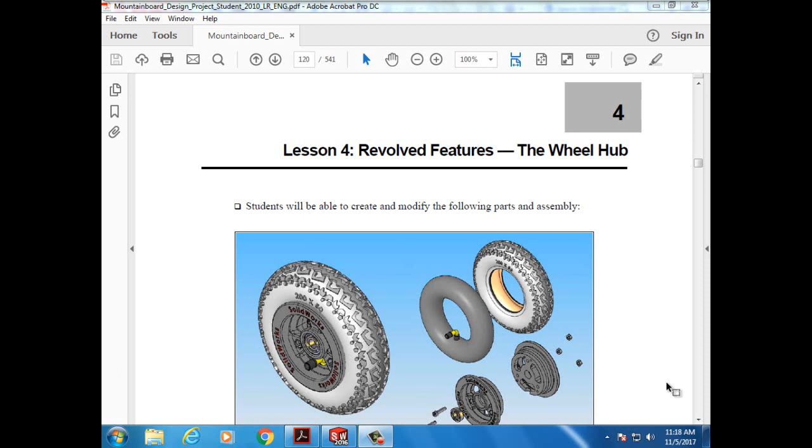For this lesson, lesson 4, we'll be looking at the revolved features by creating this wheel hub here. Students will be modifying all of these parts. This will be your completed assembly, the entire tire, and you'll be putting your name on the side of the wheel hub and creating an assembly to put everything back together.

So let's take a look at the first thing we'll be doing today, and that is we will be creating this circular object. All right, so we're gonna open SolidWorks, and we're gonna have a new part. What we're going to do is start on the right plane, and we're going to create this. This is approximately 25 by 25. Now, if you see here, this is 21. That's approximately 25 by 25.

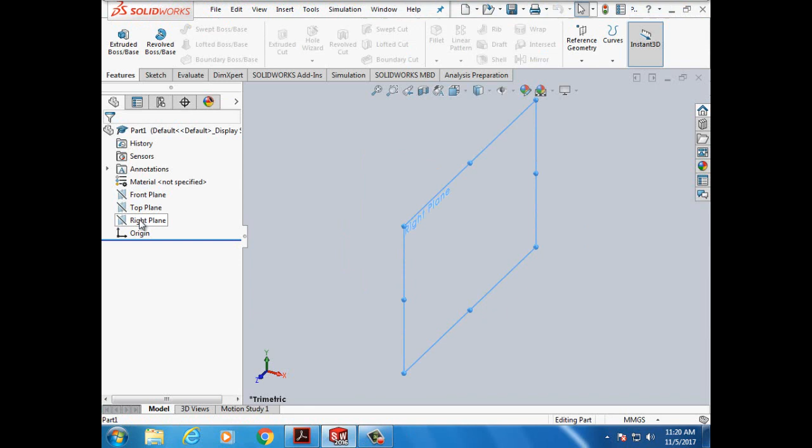We're going to be creating a center line to use, and we're going to be going right off our origin. Using that, we're going to go from the top left side of our origin to put this together. All right, so we have our new part. We're using the right plane, and we're going to create a sketch, and it's going to be rectangular. We're going to use the corners, not the center like we were doing before.

First thing I want everyone to do is go into our tools and make sure that we have this in millimeters. We're going to hit tools, come down to options, and then go to the document properties, and we're going to do units, and a lot might be set to inches. We want it to be on millimeters, and then we're going to hit OK so we know what we have here. So here's our origin point, and this is our right plane.

We're going to do our corner box. As we see from the drawing, we want it to be approximately, not smart dimension, but approximately 25 by 25 millimeters. We can look at that, and that's approximately that. Now, if the box is small, I can just roll in with my mouse to make that larger. And let's take a look. So we have our box from the origin.

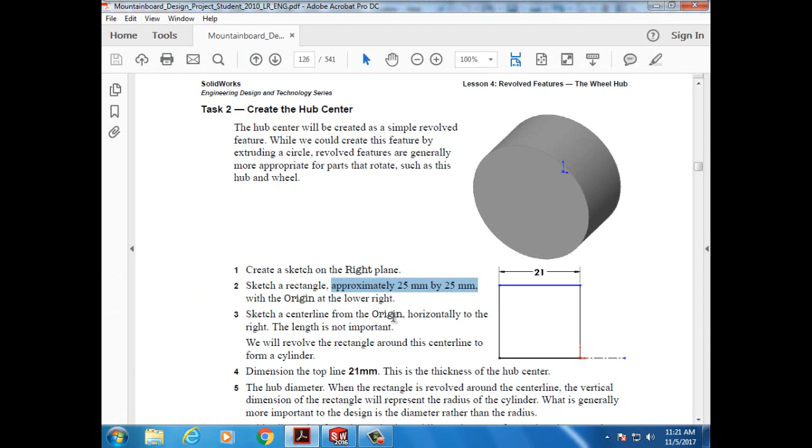Sketch a center line to the right. So we're gonna come up here, and we're gonna go on center line, and we're going to do the same thing from the origin. We're gonna draw a center line to the right. So this is what we have so far. Dimension the top of the line to be 21 millimeters. So we're gonna smart dimension the top across.

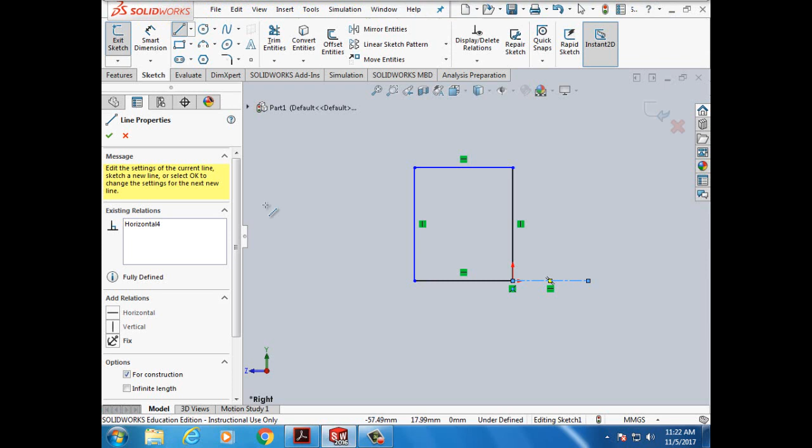We're going to want our circle to be a diameter of 40. So we're going to want to make this 20 for our dimension upwards. So let's take a look at this. Now we got our smart dimension tool. We go to our smart dimension tool, and we have this set up. We don't want that. Turn that off.

Click Smart Dimension tool. We're going to want to pick this line, and we want this to be 20 millimeters, 20 mm. We hit OK, and we want this top to be 21 millimeters, 21 mm, and we hit OK there. All right, and we can go off the Smart Dimension, and now that we have it smart dimensioned, our diameter is going to be 40, so this is going to be 20.

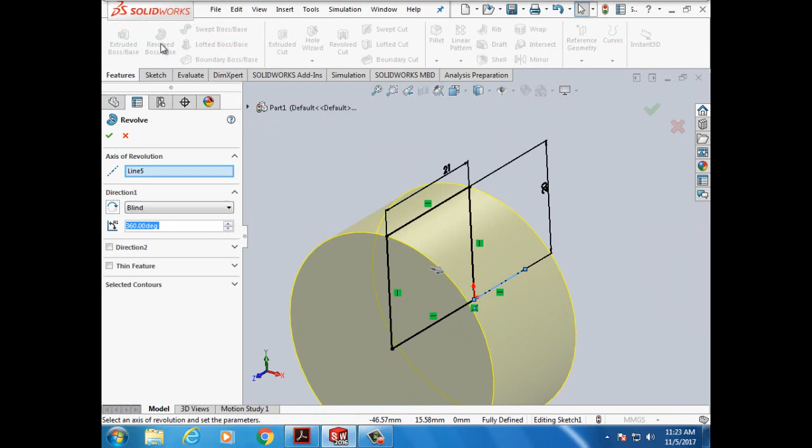What we're going to do is come down here, and we're going to revolve the hub. So we click the Revolved Boss Base feature on the Features toolbar. We go to our Features toolbar, and we do Revolved Boss Base, and you can see it already set it across for us. We want this line to be our axis line here, which was pre-selected, and we want this to be 360 degrees.

So we look at this, we have line 5, which could be a different line number, but the one we have is line 5 because we have the 4 lines for our rectangle, and then our center line was line 5. And we want this to go around 360 degrees in one direction.

So we're just going to leave it, for the dimension, we're going to leave it blind. And that's our one direction. All right, and then I hit OK, and we have our circular shape here. Okay, so

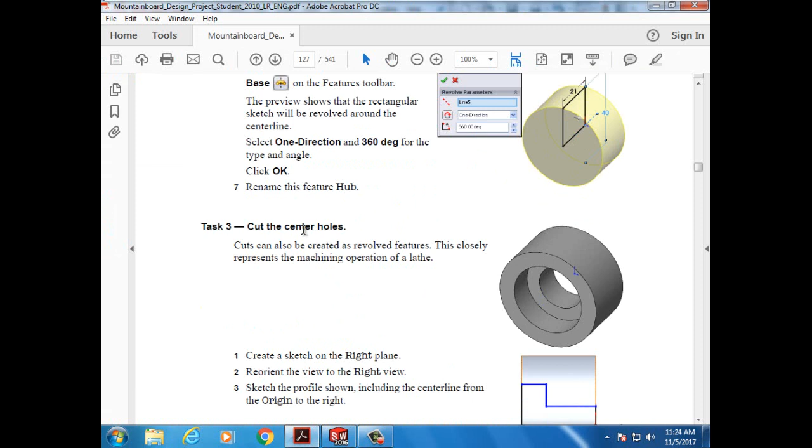next thing we're going to do is we're going to cut the center holes. And once again, we go to the right plane, and we want to have the right view, and we're going to draw on that plane. We're going to draw this shape, and then we're going to smart dimension this shape so that this is 8 across, this is 18, so 18 from top to bottom would be, half of that would be 9, and then

we have up and down here we have 14 plus 14 is 28, so this would be 14 up and down, and this would be 9 over here, and then this is obviously 8 across. And then these lines are just going to fall. We're not going to smart dimension these lines.

This across is going to be 21 because it's the entire length, and then these lines will just fall into our dimension. So the first thing we're going to do is we're going to draw all these lines in retrospect on the right plane using our right view to do that.

So I'm going to click on this, and that's the left view, that's the front view, this is the right view. So I got the right view, and I'm going to click on the right plane to select that. So you can see it says right plane, and now I'm going to pick sketch because I want to draw on the right plane. So I have the right plane selected first of all, and I'm on my right view, and I'm going to pick sketch,

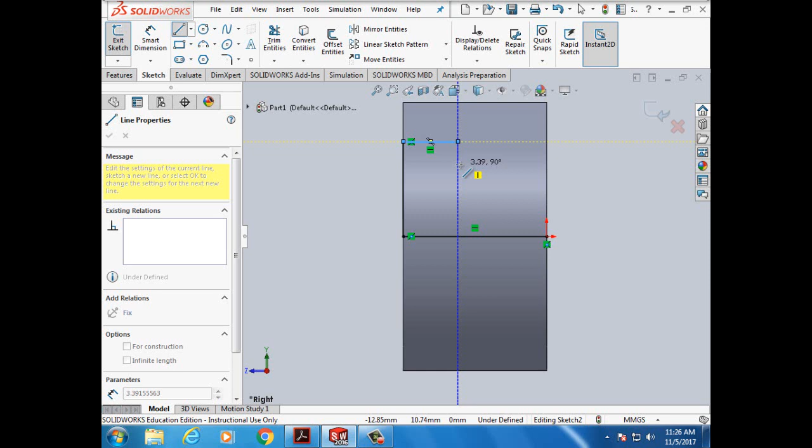And then I want this to go down a little bit. And then I want this line to go over. And then this line should be 9. It's a little more than 9, but now I'm going to smart dimension everything. So I go, okay, that's great. So now I'm going to smart dimension. So this line was already selected.

If I didn't want to select that, I would select off smart dimension, and then I would click somewhere. You see how that was blue and now it's not blue anymore? And then I click select smart dimension. Then I could pick any line I want. So I can pick this line here, and I could say I want this to be 8 millimeters.

And then I could pick this line here, and I could say I want this to be 9 millimeters. And then I could pick this line here, and I could say I want this to be 14 millimeters. Alright, so

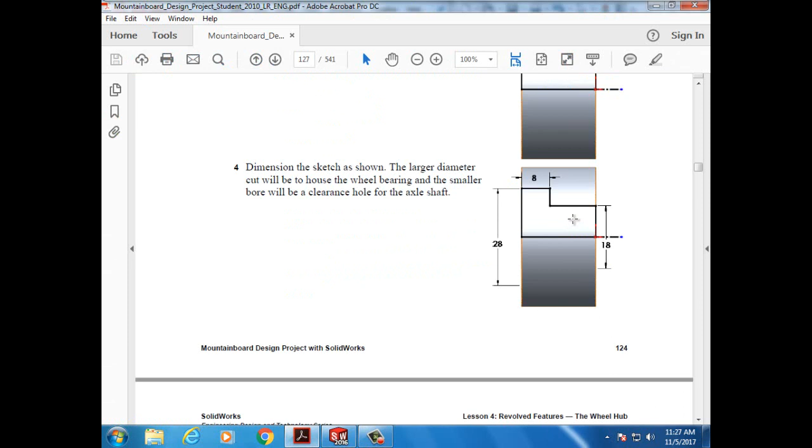something I have to add to this now, I click off my smart dimensions and click that. And then I want a center line right off the base going in this direction, just like I had before. And that's because I'm gonna do something here. So I got this all drawn, 14 up, 9 across, 8 across, and then these just fall right into place.

Now I'm going to do the Revolve Cut on the Features menu, and I'm going to pick that line that I had drawn, my center line, and it's going to revolve it around. So I go, this is great, this is great, Features, Revolve Cut, and you can see that it already picked this line over here.

If it didn't pick it, I could click somewhere else. So that's line 6. That's not going to work as good. So I want line 9, which is this one way over here, and I want that to be 360 degrees, and we'll leave this in blind again.

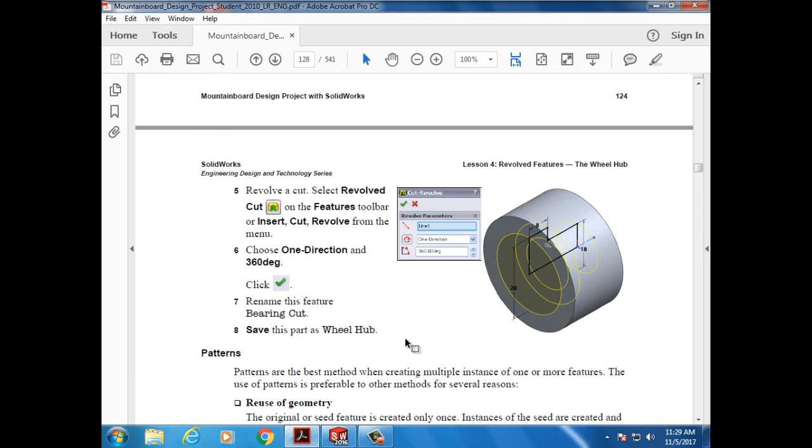And then when I click on this, it doesn't look like anything happened, but if I click on my right arrow, you could see that I've trimmed this circle out, and I have something that looks like this now. So we save this and we name it the wheel hub. So now I'm going, okay, I got this done.

File, save as, and I'm going to call it the wheel hub. And make sure you put it in a file where you know where it's going to go. So I'm going to change this, and I'm going to go to my POE folder.

And this is lesson 4, and I'm just going to put the wheel hub in there and save it. So now I know exactly where my file is. If I want to open it tomorrow and add more to it, then I can do that. So we got this done.

Now we're looking at patterns. We're looking at creating a spoke. All right, so create the sketch on the front plane, and you want the front view to do that. So first thing we're going to do is we're going to come over here, and we're going to open this up again. And we have our left view, our front view, our right view, our back view. We want the front view, right? So this is what it looks like.

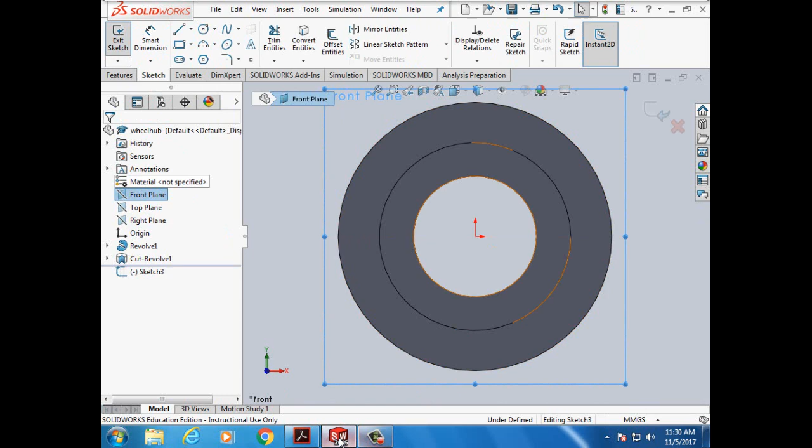And then we're going to go on the front plane. So I'm going to click on that. And you can see this is going to say front plane. And then we go on sketch. And now I'm going to open my sketch. You can see here's our origin here. And it says use dynamic mirror entities, but I don't like using dynamic mirror entities. We're just going to use regular mirror entities.

So we're going to draw this center line from the origin, as it states. So zoom out a little bit. I'm going to pick center line, and it just says draw a vertical center line up. So that's what we'll do. Pick the center origin. Straight up. I can zoom out while I'm doing this. Doesn't give us any specific measurement, so that looks good.

And next thing we're going to do is we're going to sketch a line from the hub outward. Symmetric line will appear. So we're drawing this line out to the side. And like I said, I'm not going to do the dynamic mirror entities. I'm just going to do a mirror entity, so that it is symmetrical. Okay, this is great. So now I have a regular line, and I pick. See how that turned orange right there? I pick a point, and I'm going to draw outward from there.

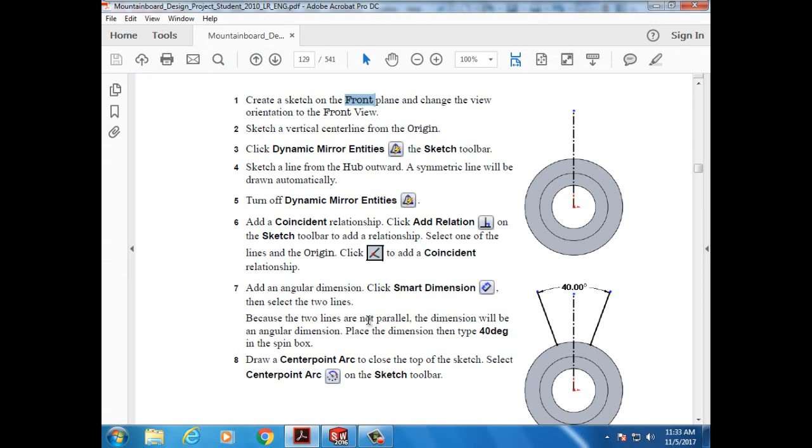Alright, so add an angular dimension between the 2 of them so that it's 40 degrees between the 2 lines. So we go on our smart dimension here. I click on this line, and then I click on this line, and then I make it 40. It's 40 degrees is what it's going to be. So you can see this made it 40 degrees. So that's all set right there.

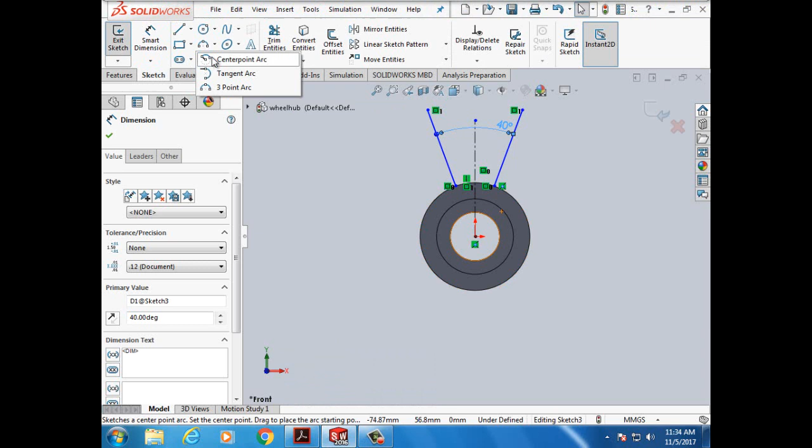And then create a center point arc to close the top of it. And then set the radius to be 43. So get off the smart dimensions. I want a center point arc, and this is obviously the center point. I click on the center and I drag, and then I click on this guy and I draw that across until this turns orange on this side. I can let go, and now I say, okay, that's great.

And then I smart dimension this so that I want this to be 43 millimeters for the radius. So it's set at 49, so I'm gonna put 43 mm. And now I have this shape up here. It's gonna be a spoke.

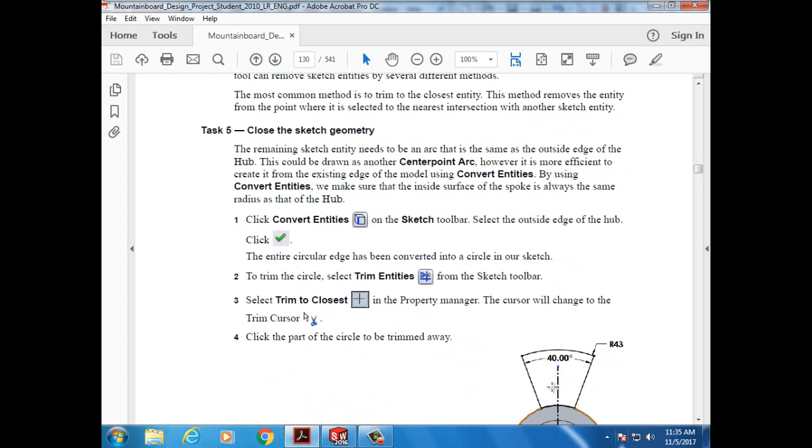All right, so now we're going to talk about converting entities and trim entities. So we come over here to close this geometric entity so we can do something with it. You can see we're gonna create this line right here. So first thing it says, click the convert entities and select the outside edge of the hub. So we want to convert entities. Well, let's get rid of this first. Okay, so now we go to convert entities.

So we have convert entities. We want to make sure we're there, and we click on the outside. See how this whole thing turned orange? Okay, that's great. So that means we selected that whole edge right there.

The entire circular edge has been converted to circle. To trim the entity, select Trim Entities from the sketch, and then Trim to closest, and then click on the part that is being trimmed away, which is this outside part. See the little scissors right there? So we go OK, that's great. This is what we wanted.

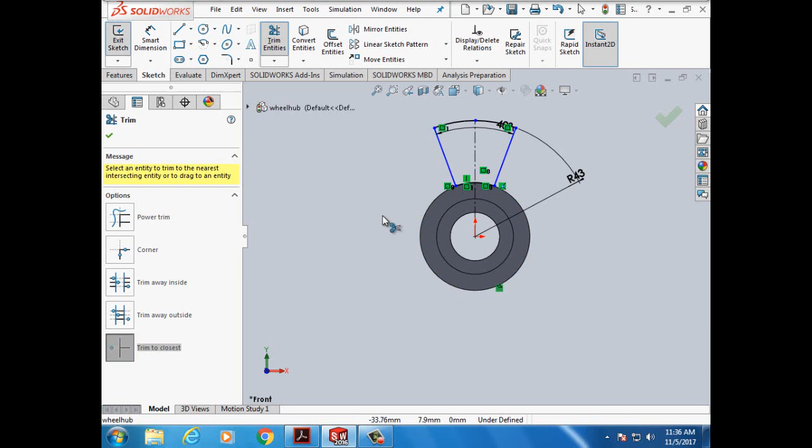And then we go on Trim Entities. It might already be selected because this is the one we use a lot. So you go Trim to closest, and we click on the outside edge, and that trimmed it away. Didn't really look like much happened, but if I zoom in, you'll see that this part of the circle is still dark, and this part isn't.

What we did was cut away everything that was outside of these two lines, and keep this. So this is a closed geometric shape. Now it's a closed unit. This dot is connected to this dot, connected to that dot, connected to that. And now we can come down here and extrude the spoke to a blind depth of 15 millimeters.

So we go OK, that's great. We close that up. We go under Features and we go Extruded Boss/Base, and it's already set at 10 millimeters, but we want it 15 mm. Then I can click the arrow, and I want to make sure that it's going in the right direction. Okay, that's the correct direction. So I click OK, and this is what we have now.

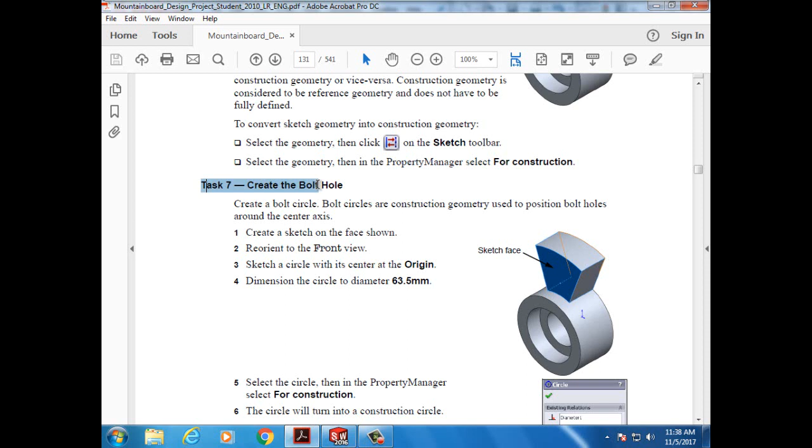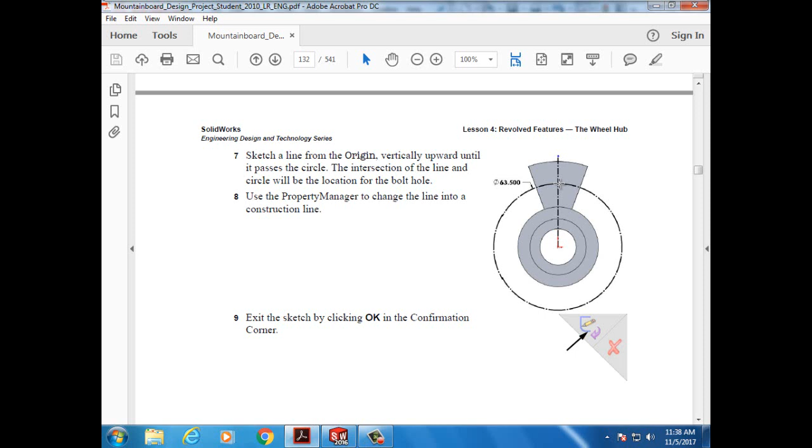So now we're going to do task 7. We're going to create a bolt hole. To do that, we're going to click on this sketch face to highlight it, and orient it to the front so we can look at it. We're going to sketch a circle with the center at the origin, and its dimension is going to be 63.5. So we need to create a center line and a circle for construction so that where they intersect, we know exactly that's where we're going to create this.

So let's take a look at this. First thing we want to do is look at the front hub here. We're going to select the front face, and we're going to do a sketch, and we want a center line that goes from the center point straight up, and so long as it's larger than our whole wheel hub, that's all we need. That's great. And then we're going to go on a regular circle. So select it, and I start in the middle, and I pull this out.

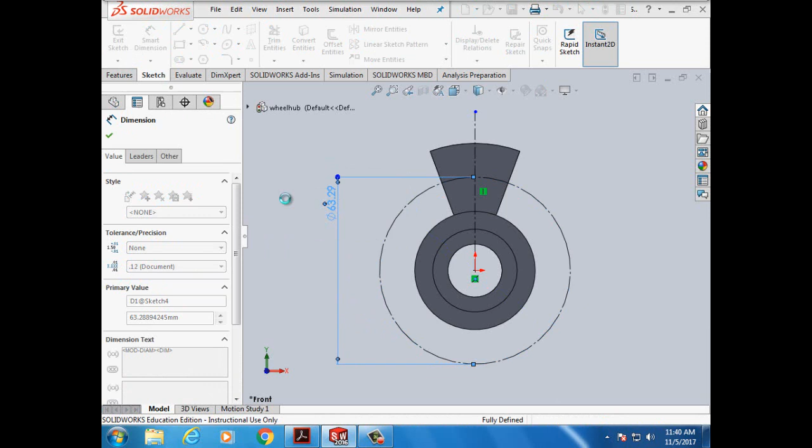And this is our smart dimension. Right here we can set it for construction. If you click on that, you'll see it's dashed lines now. It's not a real circle, it's an imaginary circle that we're going to use for construction purposes. We're going to smart dimension that so that it's 63.5 millimeters. And we go OK. So now we have this intersection, our straight line up, and this circle that's 63.5. So this is the center point of our wheel hub spoke.

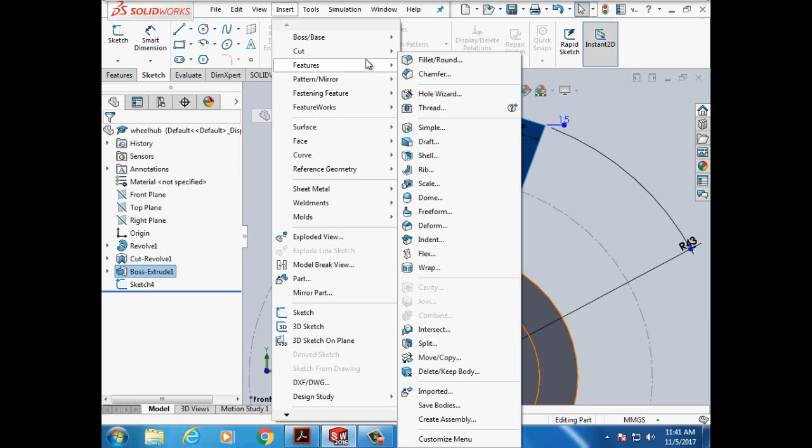And now we're going to add a hole using the Hole Wizard. First, we're going to select the face of the spoke again, and then we're going to Insert, Features, Hole Wizard, and set all these dimensions the way we want. So exit sketch. First we select the face, and then we do our Hole Wizard. Insert, Features, Hole Wizard.

This is a little bit different because this is the latest version. What we want here is this kind of hole. This one's still the same. And we want it to be metric; it's in inches, so we're going to change that to metric. And then we want screw clearance type. Let's see what we got here. And then we want M6 and Through All.

M6 and through all, so through all is selected. Alright, so that's fine, so this one. Now for position, so we got all this. This is all set, we clicked here. We want metric, we want screw clearances, M6, and then through all. The rest of it we can keep the same way.

Alright, so now you click on the positions tab. You could edit the location. So let's go to our positions. So this is our positions, and this is really nice.

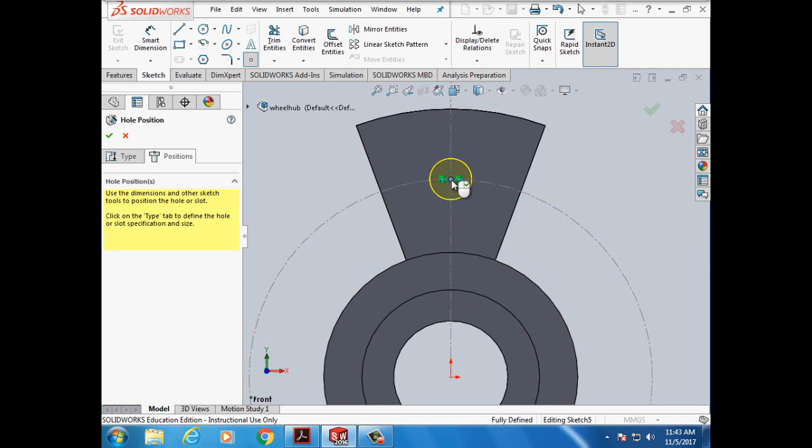So you could see I have this circle coming in here, and that orange circle right there is where they intersect. So I just click there, and this newer version is a lot easier. So we had it all set, and then it intersects. So now we can just hit it, and there's our hole. So there you go, it's that simple.

Alright, so this is what we have. It looks fine like now. Now we're going to add a hex cut.

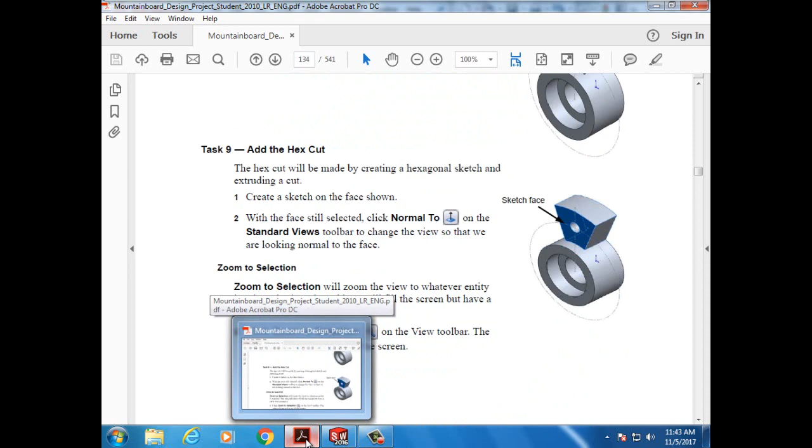We want to go to create a sketch on the face shown, so we're going to select that face, and then we want to do the normal to standard view and select it, zoom in, and use the polygon tool. We could just draw it right in the middle, we'll show you that. The instructions say to go offset a little bit. Alright, so...

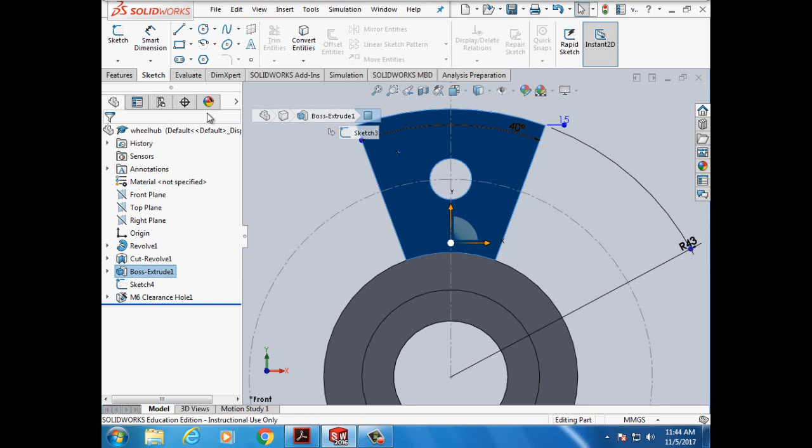First thing we want to do is select the face. It says to do the normal view, but I'm not going to do that, I don't think I really need it. So I'm going to go on sketch, and then I want the polygon tool.

And I think we want 6 sides, right? 1, 2, 3, 4, 5, 6. Yep, 6 sides. Here's all the, we're going to want it to be concentric, and we're going to want the diameter to be 10.5 millimeters. Alright, so I selected this.

We're on the face. So concentric means they have it off to the side, and then they add relations. But this is concentric right here. So I'm just going to start right at that little orange point, and I'm going to pull this out, and it's going to look like this, but we're gonna straighten it out.

So I click that, and then I'm going to want to smart dimension this, and I'm going to want the circle part to be, I think, 10.5 millimeters. Alright, so 10.5 millimeters, alright, so that's the correct size. And you go, okay, that's great, all done with that.

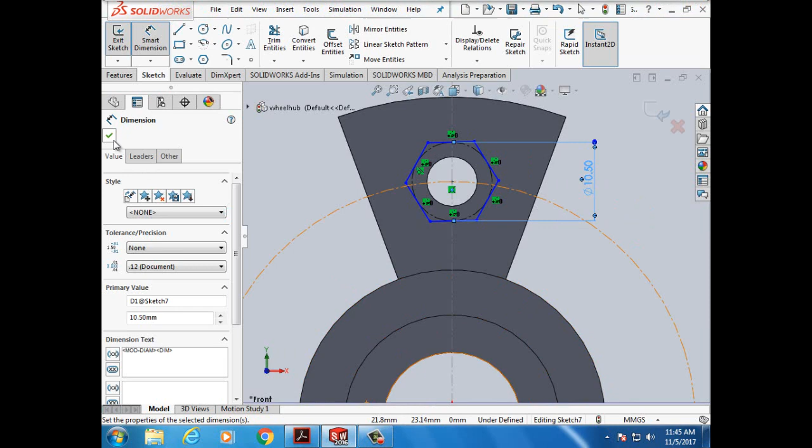Alright, so now what we want to do is, I drew it horizontal, but we're gonna add relationships there. So we can do add relations, and I could just pick any one of these lines. I could pick this one or this one, I only need one line though. So I pick one line, and I want it to be horizontal. So you can see it turned slightly, so now I know it's truly horizontal.

So next thing we're going to do is we're going to extrude cut, and a depth of 6.5 millimeters. So I'm going to, it's a 15, I want 6.5 millimeters.

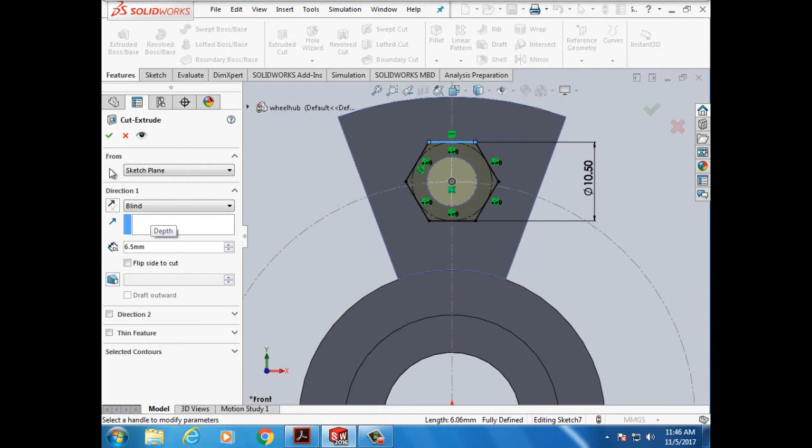And you can't see anything yet, but you can see that I cut it. Let me zoom out so that you can compare this to the picture we have, and you can see that we have that.

Alright, so before I do anything else, I'm going to save it. It asked me to change this sketch to hex cut. It's not really necessary, but obviously I can right click in there, or I could double click on it.

There we go, and I can hit backspace, right, here we go, and I could call it hex cut. It's just simply so you know exactly this is the hex cut. It's not really necessary that you do that, but it's nice to be able to do it so that you have a better understanding of what we have over here.

Now, once again, I said I was going to save it, so I'm going to hit File, Save. You should probably save more often than me in case you run into some type of mistakes, but here we are, very good place to be.

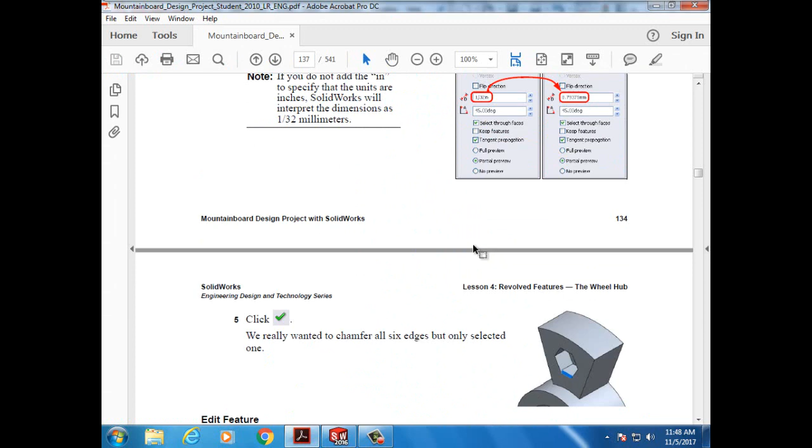And the next thing we're going to do is we're going to end up chamfering our dimensions, and we're going to chamfer all these sides all the way around, all 6 sides, no big deal.

And this is what we want our chamfer to be: 1/32 inches, or if you type that in as 1/32 IN, it'll convert it to millimeters for us to give us a more precise measurement in millimeters. So let's go ahead and do that.

In SolidWorks, we have chamfer, and just start with one line. Here's in inches. I go 1 divided by 32, I think, right? 32, and IN for inches. And if I just click somewhere...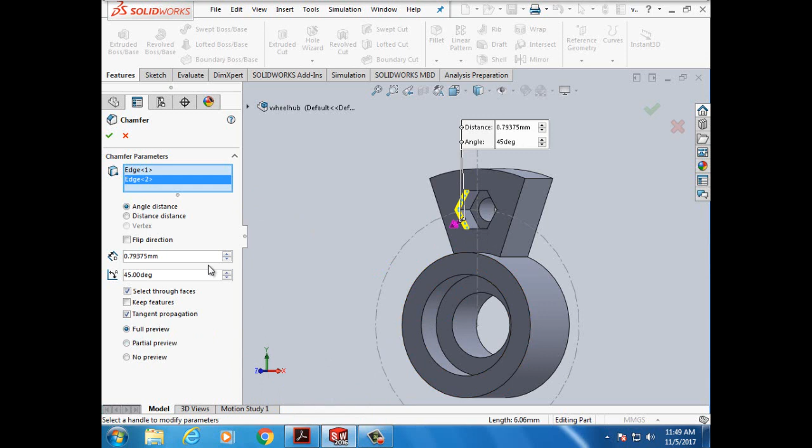Is that 45 degrees still? Full preview. There we go. So you can see it's translated into millimeters for us.

And then I just pick these lines. I could zoom in to make sure that I get the exact line I want. I could also push my arrows here so that I know I'm getting the exact line I want. And then I got all 6 of these lines. I hit OK.

And there it is, nice and chamfered. I'm going to zoom out a little bit, rotate it a little bit so you see. Click off that. So there you go, you got your nice chamfer there.

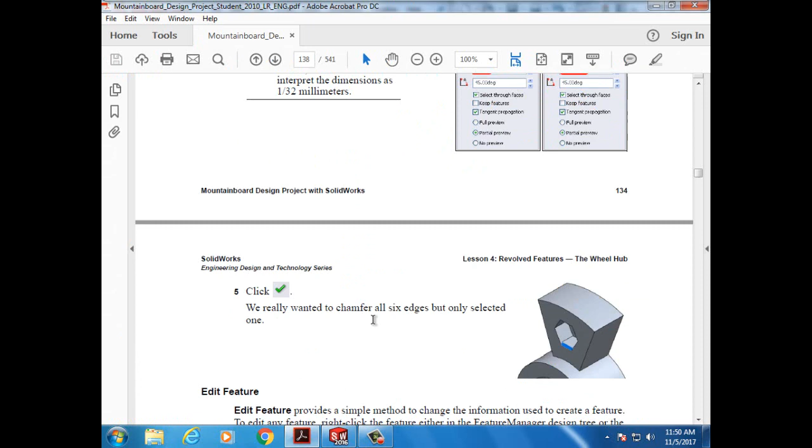All right, so we're done with that part. We got all those faces. All right, so now we're on the rim. We're going to create the rim.

And once again, we're going to want the right view, and we're going to want to select the right plane. And then we're going to draw this shape, and then we're going to end up smart dimensioning it way over here. And then we'll revolve it out.

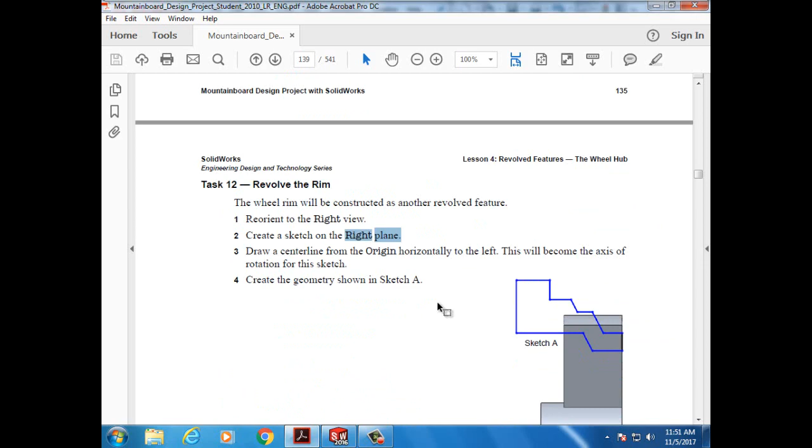All right, so right view, right plane—it says right plane there. Sketch. Let's see. So no exact measurements are given to us right here.

You're going to see, here's where our exact measurements are given to us. You're going to see that you want to draw these lines. All right, let's zoom in.

All right, so zoom out, zoom in. That's about right. All right, so you could see that this is the curve, and you can see here's where the lines are. So you want to start this line that's about 9, and you want that to be just a little distance under the line, and then you're going to want this line to be just a little bit above the line, and you're going to want these to be more than halfway across.

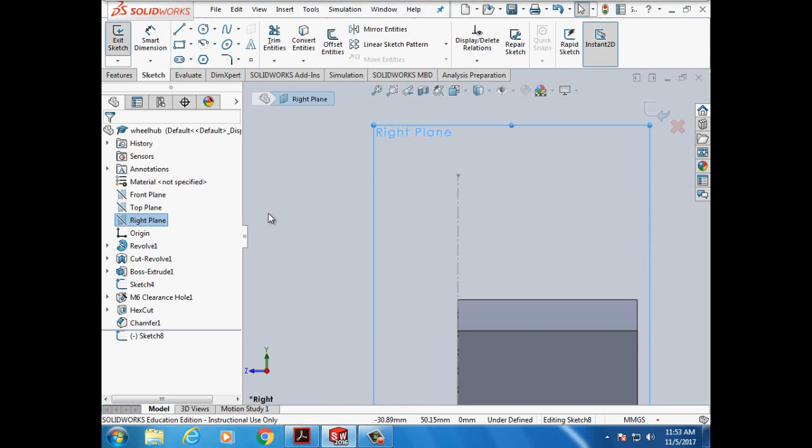And you're not going to want to lock in on these lines here. So you got to kind of do this a little bit slow, especially at the start point, so that you have something that's approximately what you want it to be. So I'm going to do just these lines right here, and I'll show you how to do it. So we got line.

So I start on this line, and it's just a little bit below here, and I want to be about 9. So this is 9.35. That's fine with me. You don't have to be that perfect.

Then I want to be just a little bit—so if I stop on these points here, any of these points, I'll lock the measurement in on that. So I don't want to stop at any of those points. This one is just a little bit above it. And let's see what we have here. That's 7.5. So I'll draw this.

So I don't want to stop there because that'll lock it. That's, you can see this line here, I don't want to lock it in that position. So I got something like 7 point... there's 2.6. So that's close enough for me.

Then let's see, what else do we got here? So then I'm going to do an angle here from here to that line, right on that line, but I don't want to go all the way to the top. So let's go ahead and do that.

So I'm drawing a line from here, and I don't want to stop there. See this halfway line? That'll lock it in that position. So here's a good place—anywhere in here is a good place to lock it in. So that one's there. And then this is just a little line.

So this is nice, I don't want to stop here though. This yellow line I'm on shows that it's parallel, and I'm going to have to make these parallel. That's fine. But this line here locks into that position, and there's a line here—I don't want to lock into that position either.

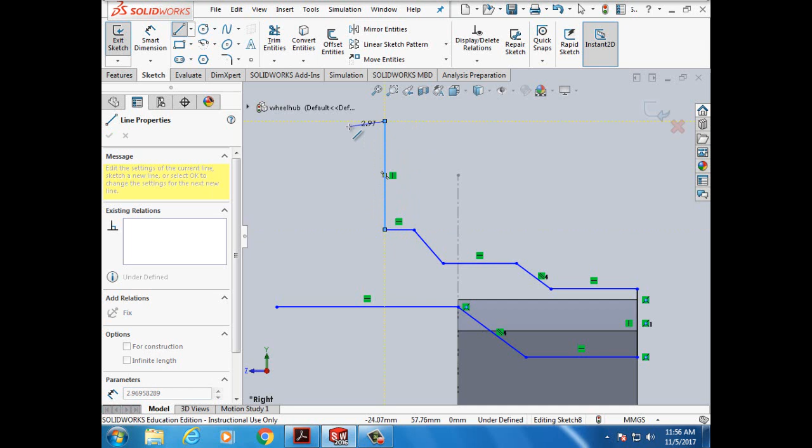So now I'm going to do a little step up, a little step over, and then a line that's about right to, yeah, about 9, and then it should be 7 across. Or I could do this. Well, we'll do that first. So there's a lot of ways we can do this. So this is going to go up a little bit, and then it's going to be over a little bit, and then it's going to be up about 9. And then it should be over about 7, but it's a little too much. But this is going to be, we're going to smart dimension this stuff. All right, so there we go.

So now we have this shape. So we go, okay, that's great. Now we're going to hit the smart dimension tool. Let's click somewhere off the smart dimension. Click. And now I do smart dimension. So let's look at this one, it's 15. Let's just make that 15 millimeters. This one is 9. Let's make that 9 millimeters.

And we're hoping we don't get any major flaws. This one's 7 across and 9 up. So let's do this 7 millimeters. This one's 9 millimeters.

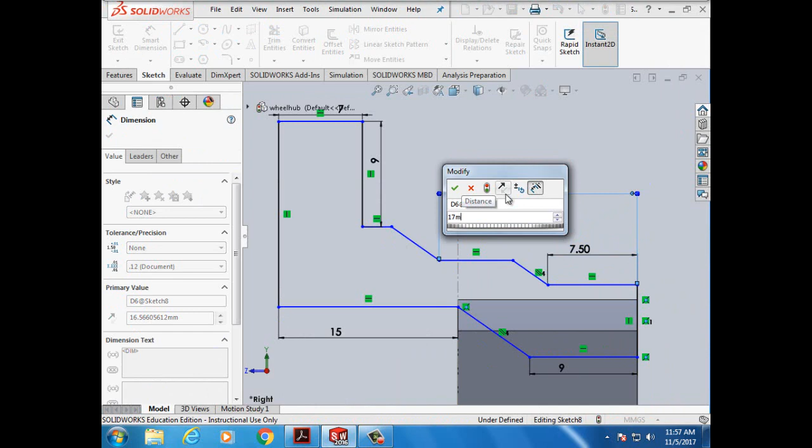This one's 7.5, and this one's 17, and this all the way across is 30. So let's do 7.5 first. This one's 7.5 millimeters. From this point to this point is 17 millimeters, and from this point to this point is 30 millimeters.

So we have from this point to this point right there. Oh, it's already 30. Just cancel it. So that's 30, so that's good. We already had it there.

Alright, so now let's take a look at what we have here. So, oh yeah, we got this - these three are parallel, and these two are equal to each other. All right, so what we do for those, so these two we see the parallel, so they're already parallel. So I'll get off the smart dimensions here, and now we're going to add relations. And this line and this line will be parallel to each other, right? So now all three of these are parallel to each other. You go, okay, that's great.

And then add relations. This line and this line are also equal in length to each other. So we just, those are the equal signs. So we go okay. So let's see what we got measured: 7, 9, 30, 17, 7.5, 9, 15. All three are parallel, and these two are equal.

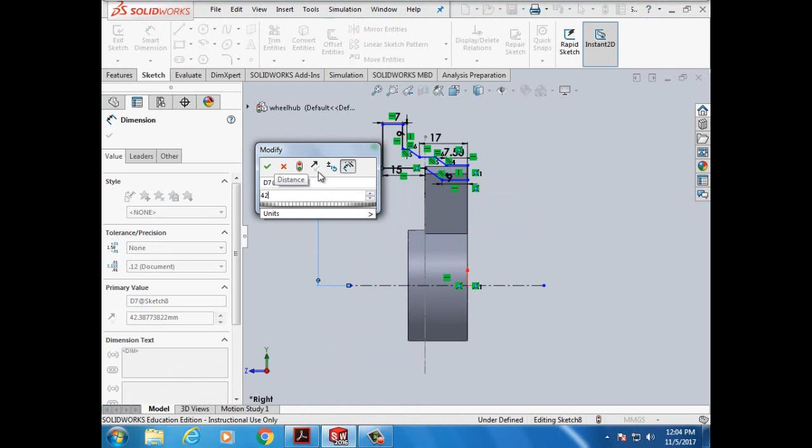So the first thing I'm going to do is this 85 divided by 2 is 42.5 millimeters. So let's do that first. So I go here, I go smart dimension from this point to that point, and it's 42.5 millimeters. And you hit OK, that's great. And then we have from the center line to the top, that's 118 divided by 2 is 59 millimeters. So we go, okay, this is from here to, and I want to zoom in to make sure we get the right one, there. And then that's 59 millimeters. And you hit OK.

And we zoom out. Let's look over here. So we have from here to here, half of 73 is 36.5. So we're going to go, okay, I want from here, and I can zoom in a little bit to this blue line, and that's 36.5 millimeters. Okay.

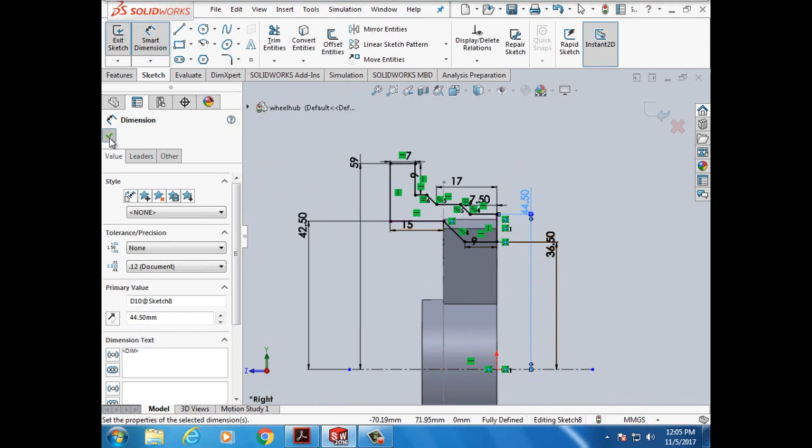And then the last one we have from here, and we're going to zoom up to this guy. We want that to be 44.5 millimeters. And we go, okay. And there you go. So now we have this all smart dimension. There was a lot of smart dimensioning in there, and you have this crazy shape that looks like that. We go, okay, that's great. And now we have that all smart dimension.

Now we're going to revolve this like we did with the Revolve Boss base. So here we go. Features, Revolve Boss base. And we already picked it around line 15. It already worked on that for us because it's looking for the one center line we have. 360 degrees blind. We hit OK. And then we look at it and boom, look at that. We got this nice shape now.

Looks really good. Alright, so once again, file save.

Let's take a look. Yep, that's what it looks like. Looks great. All right, so now we're going to do a circular pattern here. So let's do step number 1, it says click view and temporary axis. So let's see if we can do this.

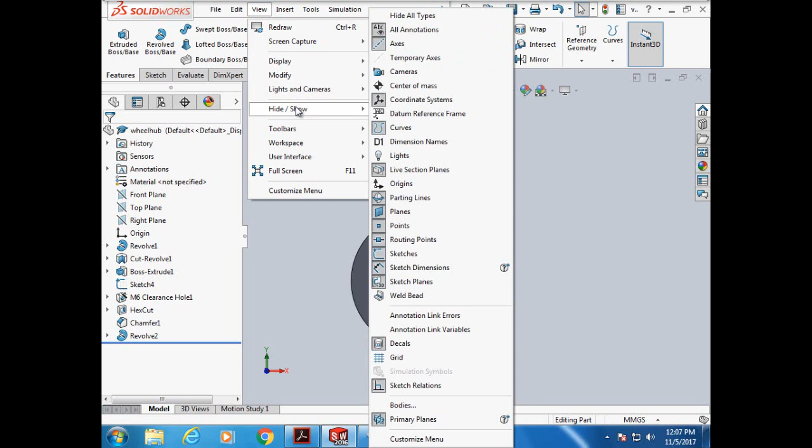View, display, oh, hide show. So temporary axis. So we click on that, and there it is. There's a little temporary axis that showed up, that little blue line, because we clicked on that. View temporary axis. And that was the first step.

Click on circular pattern. We're going to use that axis that it showed us. We're going to do 360 degrees. We're going to do 3 spokes with equal spacing, and then we're going to select all the things we need to be copied. So we're looking for click circular pattern. There's linear pattern, and right there is circular pattern. So this brings us up.

So the first thing we're going to select is this. I'm going to zoom in on it, rolling my mouse. I'm going to pick this blue line here. So that's our axis 1. We're going to want this changed to 3. We're going to want 360 degrees. 360. And features and faces. So let's go under features, click on this.

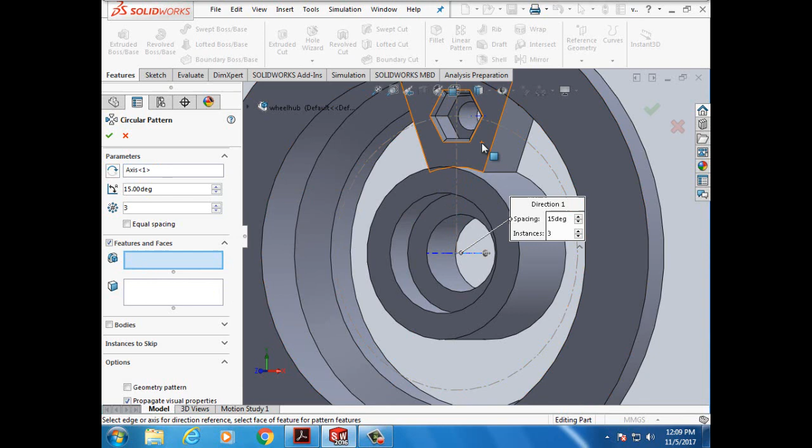This went back to 15. So let's change this way. So it says degrees. 3, hit the backspace. 360. What? 0. I'll click over here on the side. Oh, between. Okay. So it's goofy. This is going to be, let's do 120. We want it to be around 360 degrees.

But it's gonna create a circle anyway. So 120 is how we want it spaced out, because we have 3 of them, and we want them to be equal distance from each other. So the entire circle is, oh, what is that? 0. There we go. I click over here. All right, so these are equally spaced. So 360 degrees, there's 3 of them, and we want them equal distance from each other.

So we come over here, we have our boss extrude. All right, so we want to do our hole. So we'll click on the hole, so you can see the hole there. We want our hex nut cut. So we got our hex nut cut, and we want our chamfer faces. All right, so let's do 1. That's all of them.

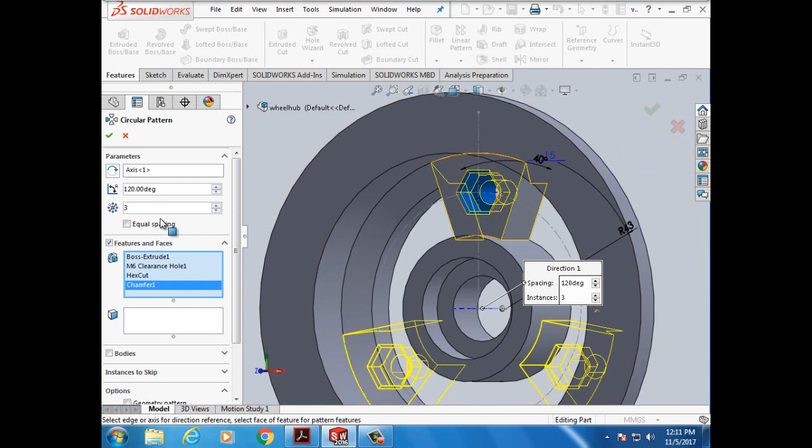All right, so the things I selected. The first thing I selected was one of these faces, and then I selected the hole, and then I selected the hex nut cut in here, and then I selected one of the chamfers. So then I'll hit this little OK button, and I'm going to rotate this 360 degrees. You'll see that this spoke has been copied and evenly distributed.

What I'm going to do here is I'm going to hit File, Save, once again. All right. So yeah, this says 360 degrees, but it's supposed to be 120 degrees for equal spacing, because a circle's 360 degrees, and we wanted them spaced evenly throughout that 360 degrees. So it's 120, 120, 120.

All right. So now we're gonna add fillets, and we're gonna have 4mm fillets added to the corners, and then 6mm fillets added to these edges on the sides. So let's go ahead and do that. All right, so fillet, it says 10. I want 4mm. And I'm going to zoom in so I can see the lines. I want one here. Looks good.

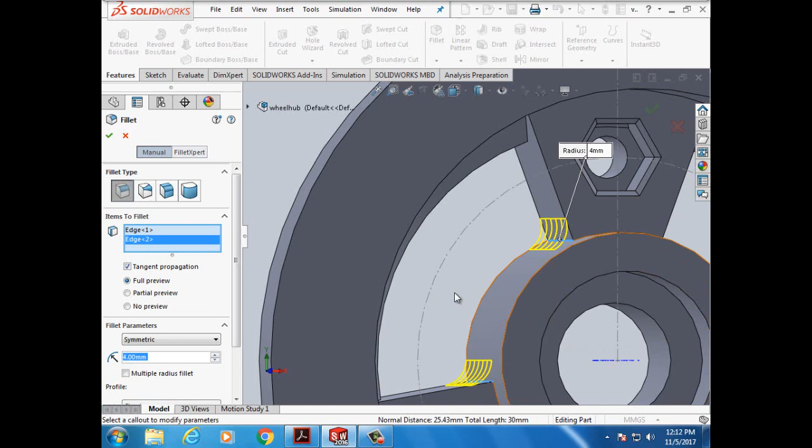I want one here. Looks good. I'm going to rotate this to this side. I want one here. Looks good. My computer's kind of slow. I want one there. Looks good. Move this up so I can see this line. One there. And then I move this around so I can get this last line.

It's computer slow. That's all I gotta say about that.

There you go. And then here we go. There. Then I'm gonna hit the OK button. And there you go. So I got those 4mm fillets in there. So now we got these 6mm fillets. So fillet, instead of 4, I want 6.

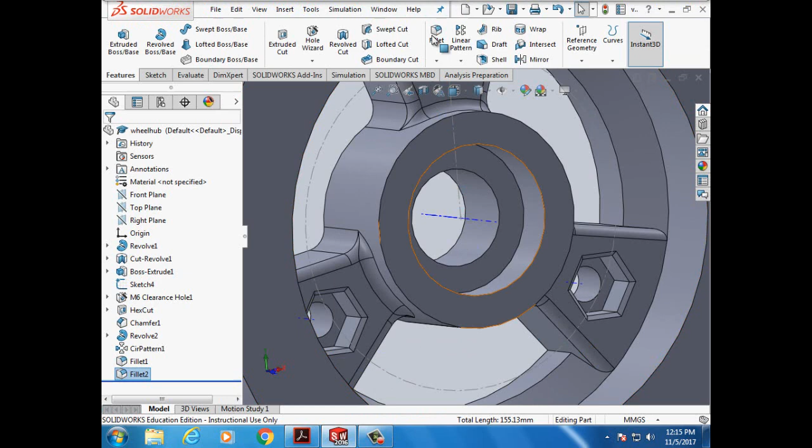So now we got 6mm fillets on these edges. So fillet. Fillet. And then this is 6mm. We got it there. It's going to be slow. There. There. There. There. And there. Then we hit OK. That looks good.

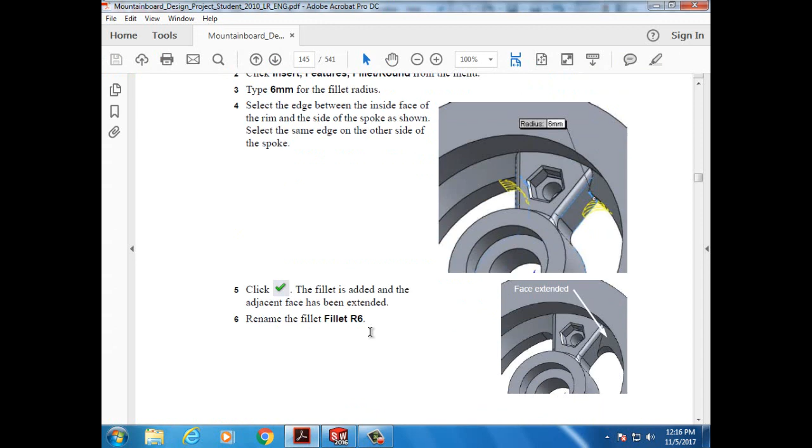Then we're going to add 3mm fillets around the top edges. So we hit fillet. Three. Let's see. This line, and this line, and this line. Okay, so this line. And this line. Yep. Rotate the arrows to get this to rotate around. This one. Alright.

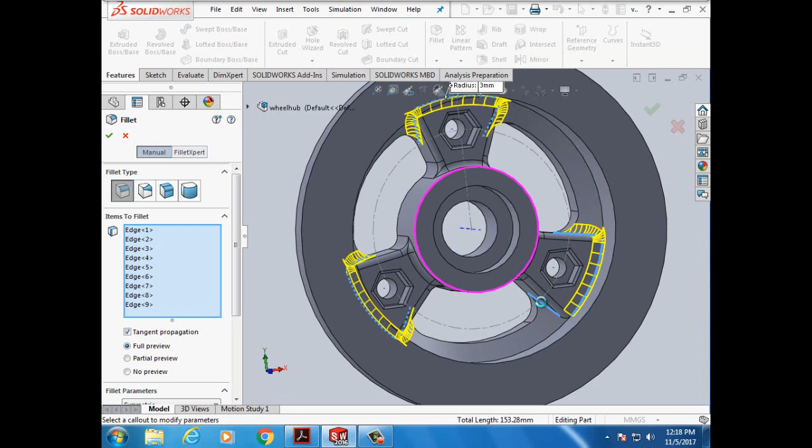Here. Here. Here. Rotate the arrows to get it to move around. Here. Here. Here. And we hit OK. Alright.

And then we add 3mm fillets on the outside edge, the inside edge, the inside edge, the inside edge. Oh, and then this edge here. So these are all 3mm. So fillet, 3mm. Okay, so we got this.

Oh yeah, what do you got? I don't know. This one. On this one. And this one. Is that all the way around? No. We're going to have to do these. This one. This one. And then there's this one. And this one. Alright, so we got 1, 2, 3, 4, and then this one.

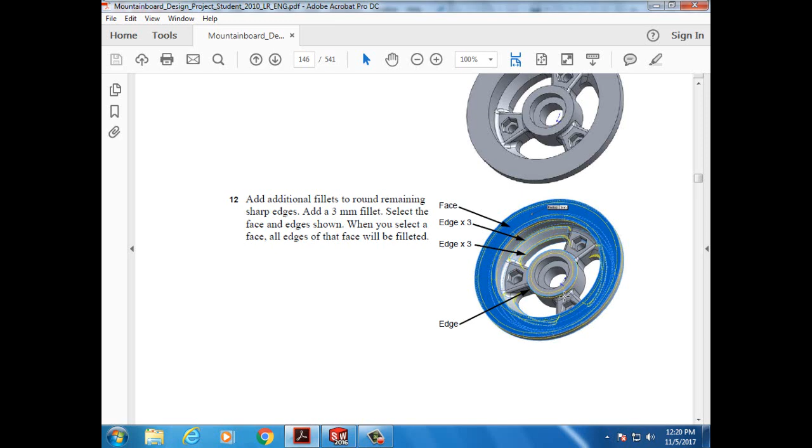Is it the inside one too? No, not the inside one. So just the outside one. So that's that. So hit this. Good. Good to go. Alright, that's nice and curved. Alright, let's see what else we got. So that's all that.

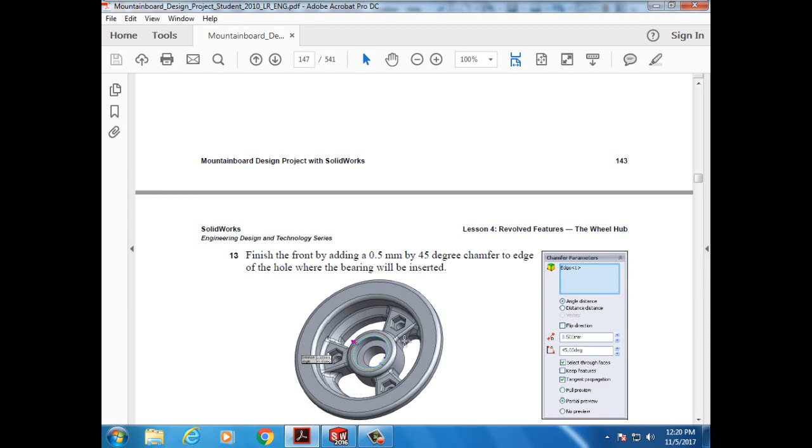And then we chamfer 0.5mm at 45 for this inside part. So chamfer 5mm. Is that right? 0.5. 0.5mm, and we pick this line right here. Okay. Alright, fine. Just that one. Alright, now we're going to hit save.

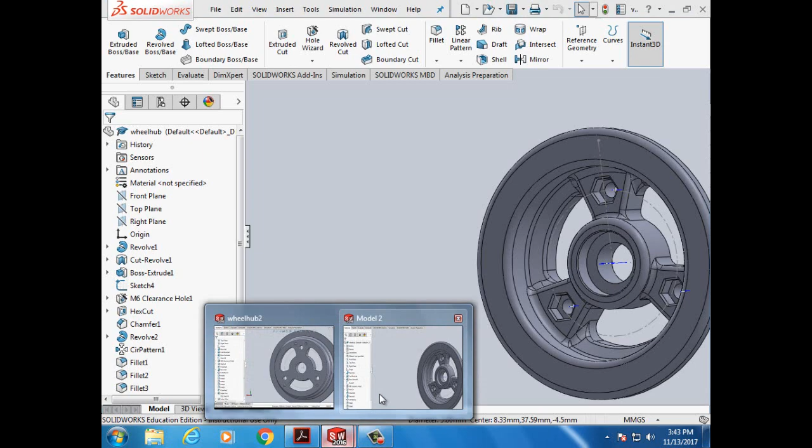Okay, here we are with task 17. We're going to add index pins, which are these guys, and index holes. First thing we want to do is change to our back view by clicking on back. So we will pick, this one says back, click on it, we have our back view. We want to select this face, and we're going to sketch a circle for construction. So we click on sketch, circle.

We start in our regular place. We don't want to lock it anywhere. Make sure you don't get somewhere where it's locked in. So right in the middle is good, like this. We want to click for construction purposes, and we want to smart dimension the circle and make it 77 mm. So there we have our circle for construction at 77 millimeters.

Now we need to create 2 lines, and we're going to have this one be 25 degrees of the circle, and the other one's going to be 90 degrees of the circle. So let's take a look. Click off smart dimension, okay, and get a center line for construction. We don't want to go through this middle part, so we can put it down here. This looks good. Start on the orange, make sure it's horizontal, and we click on it right there.

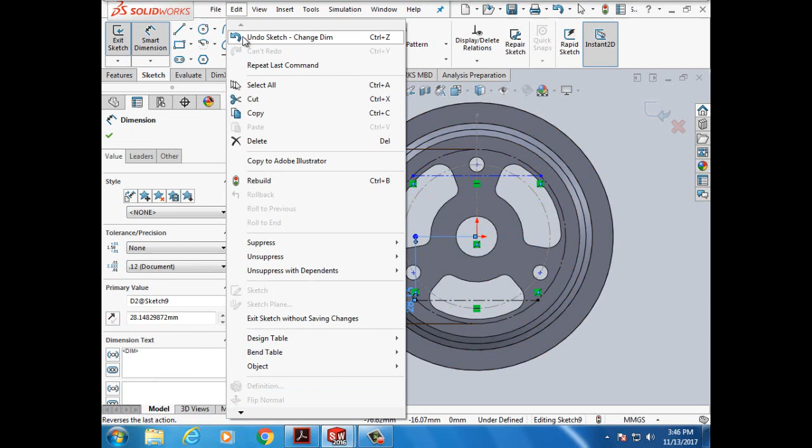And then we're going to do the same thing down here. We're going to take a line, click on the orange, draw it all the way across, make sure it's horizontal. There we go, horizontal, across. Okay, we want these lines. Now we can smart dimension. We got the 2 points. Click on the circle, click on this point, click on that. We don't want that one, get rid of that. So edit, undo, edit, undo, edit, undo.

Alright, so click here, smart dimension. We want to start on the center point, orange circle. We click on this point here, and then this point here, and this one's going to be 90 degrees. And we go okay, that's good. Now we click off again, smart dimension. We click on the center, this point, and this point. And this one up here is going to be 25. All right. So there we have our four points. Top part is 25 degrees, bottom part is 90 degrees.

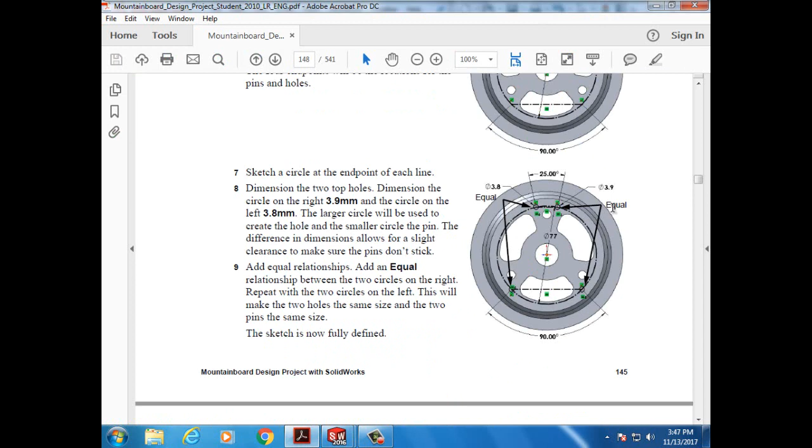Alright, so now we're going to draw circles. On this side, we want it to be 3.8 millimeters in diameter, and on the other side, we want these 2 circles to be 3.9 millimeters in diameter. So we go okay with the dimensions. Now we click on circle tool, zoom in a little bit. You want to start the circle right on that point, make a little circle here, come over here, make a little circle on this point, on this point, and on this point.

Now we can come over here, okay, smart dimension. We want this circle, that selected that circle to start with, to be 3.9 millimeters. We want this circle to be 3.9 millimeters.

We want this circle to be 3.8 millimeters. We want this circle to be 3.8 millimeters. And then we go, okay, dimensions are good. Now we go into our extrude boss base. All right, I'm going to flip this over a little bit. So you can see I have all 4 circles being extruded.

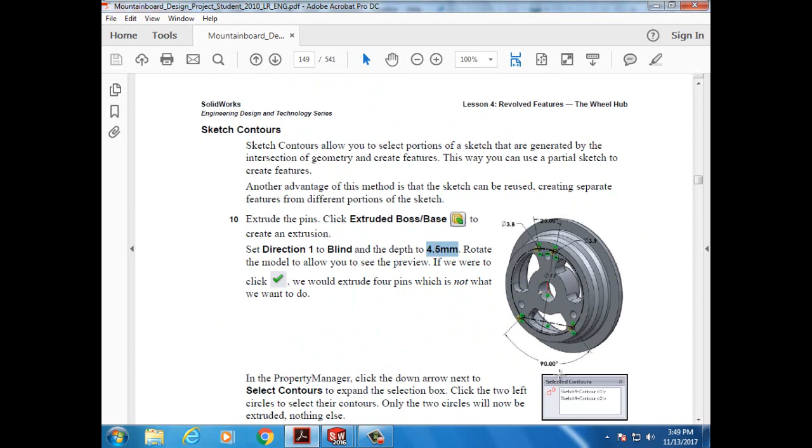Just like we have here, but we don't want to extrude all of them to 4.5. We only want to extrude 2 of them. So what we need to do is use our selected contours and select just these 2 that we're going to extrude outwards. The other 2 we're going to extrude cut. You can see over here extrude cut, so that we have 2 pins and 2 holes. So all 4 of them are selected right now.

So what we do is we come over here where it says selected contours. We open that up. Make sure we have it selected in here. We want this circle, and be careful, this circle. So now these 2 have been selected. This is going to be 4.5 millimeters. Okay. So we have those selected. So these 2 have been extruded.

Now we come down here, and it says you can name this. You just double click on it and you can change the name to whatever you want. What we're going to do is come and click on the sketch here. So I hit this to extend it, and I click on the sketch, and now I go to extrude cut. Alright, now once again this wants to extrude cut all 4 of them.

We're going to change this to 5.5 millimeters, and we're going to click on selected contours, and we're going to delete that. We don't want the whole sketch. We're going to come over here and click on this circle and this circle. So these are going to be our extrude cuts. So when I hit check mark on this, you can see that I have these 2 pins coming out 4.5, and I have these 2 holes that are going in 5.5 millimeters.

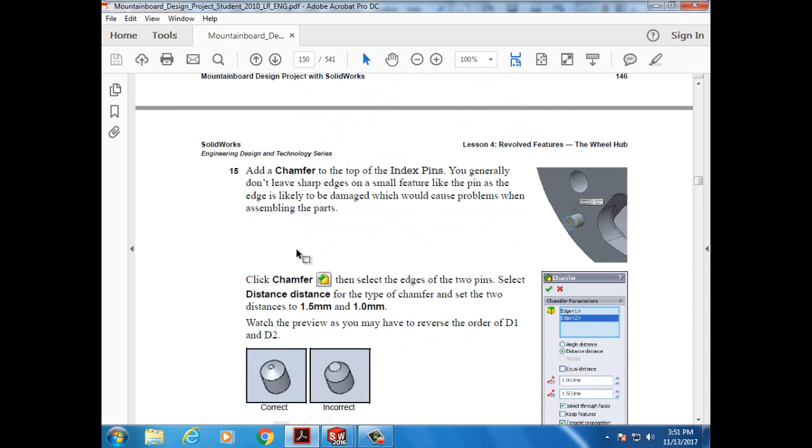Alright, so we did that. We could rename it. You just double click on it, and then you could type anything you want in there, but we're not going to do that. We clicked OK. We didn't have to rename it. So now step 15, we want to chamfer, and we want to make it look just like over here.

So we're going to click on our chamfer, select chamfer, and I want to click on this edge here and this edge here, and we want to do distance distance, and we want the first one to be 1 millimeter, and the second one to be 1.5 millimeters, and then we can hit OK, and this is what it looks like.

And then they show you a picture. It says, this is what it's supposed to look like. Alright, so that's what it looks like. We save it as your wheel hub. So now that we did that, we're going to hit File, Save. We already saved it as wheel hub once before, so we can just hit File, Save.

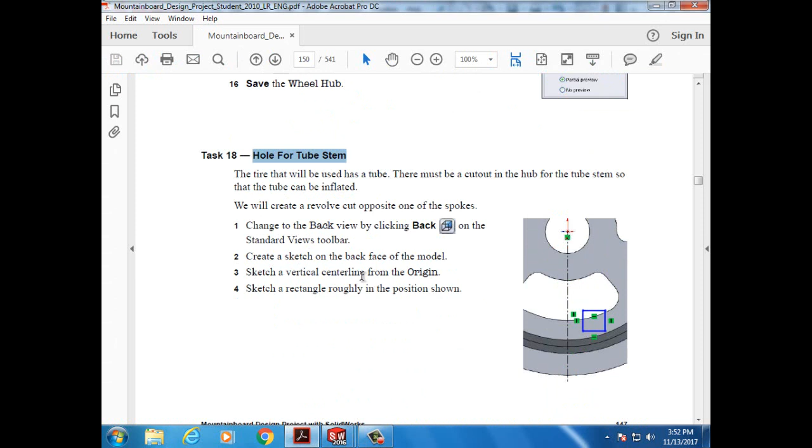Alright, so now the next part is we have to create a hole for the tube. Change to the back view again by clicking it, and then create a sketch on the back, and then sketch a vertical center line from the origin straight down. Sketch a rectangle roughly in the position shown. Okay.

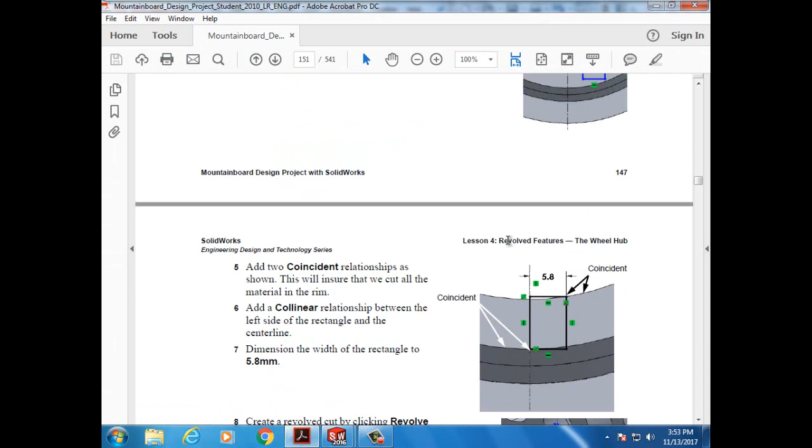So, all right, we select the back here. Get the arrows. Here's the back. All right, and we want to select our base. Sketch. Center line. We start in the center and we work our way straight down. Okay, so we did the first part here. All right, we can do this with the corner boxes. So we want to draw a rectangle.

And we want it to be coincident with this corner with the circle and that corner with our center line. We want it to be right on the center line. So the best thing to do is to get this corner circle, and you can see you could start right on that point right there, and then draw it. We want it to be about 5.8, and then we smart dimension it. Alright, that's great. Smart dimension this line.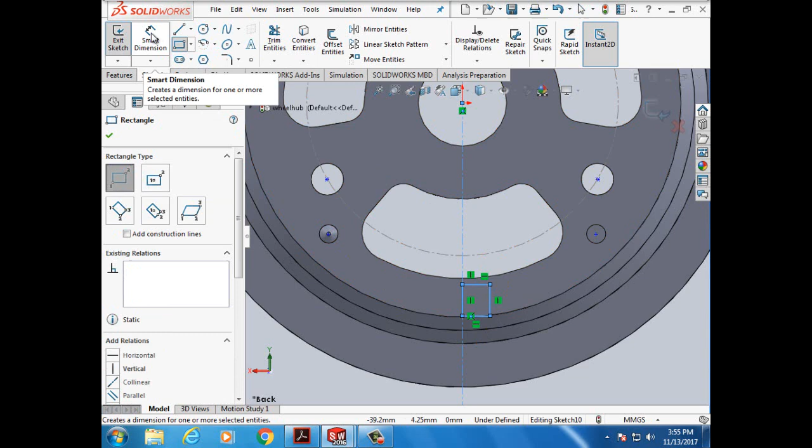Now let's do this. Edit, undo sketch. All right, so pick this corner. We're starting this. And I'll go here, and then we'll smart dimension this. Smart dimension. Boom. Click here. 5.8. Alright, so it wouldn't let me smart dimension because I had locked it in.

But now that I have, so this is locked in this corner, we have it locked right there. So what I'm going to do is I could say, okay, that's great. I'm going to add a relation. I'm going to zoom in a little bit. I want this point and this line to be coincident. And there we go. And I hit OK. So now we got that box that size. We got to have that created right there.

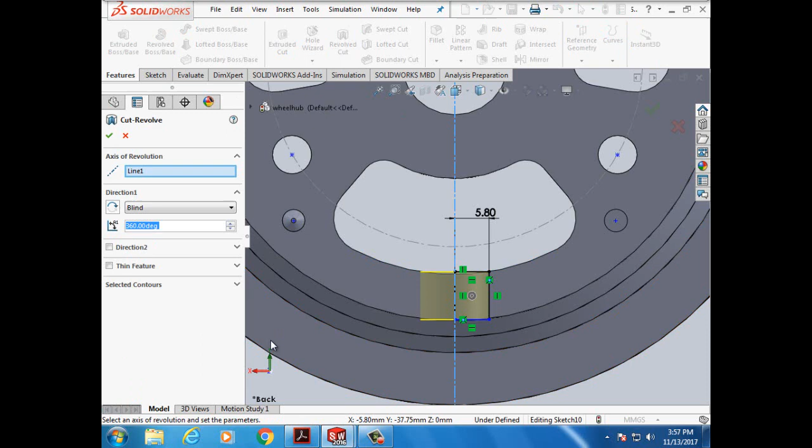So we're going to create a revolved cut by clicking on Revolve Cut. So we'll go over here, features. Waiting for this to, there we go, Revolve Cut. And it already went around the line. Let's see. 360 degrees. Okay, so here we go. So then I hit OK. And we take a look. I'm going to tap this, and we see you got a nice cut there.

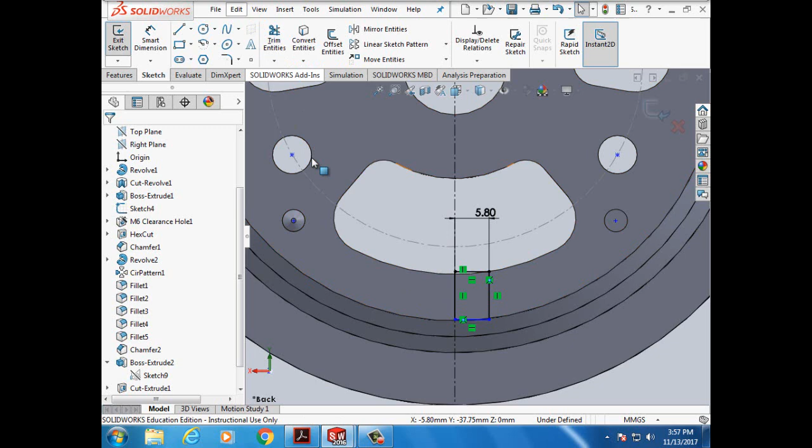For some reason this didn't. All right, so I didn't bring this down all the way. So let's go back. These are the same problems you might have. Edit, undo. All right, so let's see, add relations. This point and the circle that's below it, I get coincident. Okay, so it wasn't down all the way. It looked like it was coincident. Now we have double coincident. We have it coincident against this line and coincident against the circle. So there was just a little bit of a sliver.

So we'll hit OK. All right, so now we can do the same thing. We have our features, revolve cut, hit OK. Now when this does it, we look at it, it cuts all the way through. It's a nice cut. Trying to zoom out. Nice cut through it. So that's what it should look like. And you had a little play there that if you make a simple mistake, you can just do edit undo and go back to where we are.

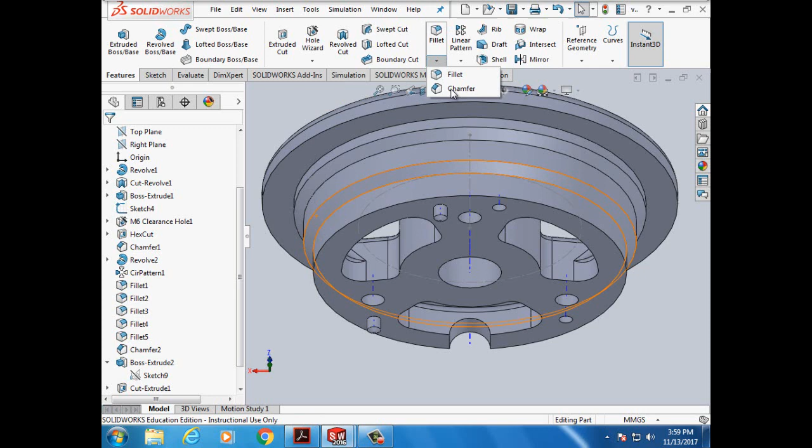Alright, so we want to do a little chamfer on the edges, 0.5 millimeters. So let's go ahead and do that. Alright, so we hit chamfer. 0.5 millimeters, and then we'll flip it over, zoom out, can't see the thing, zoom in, there we go, and do it right here on this edge, and then hit OK. And it's doing it. There we go, and it's done. So we chamfered both sides there.

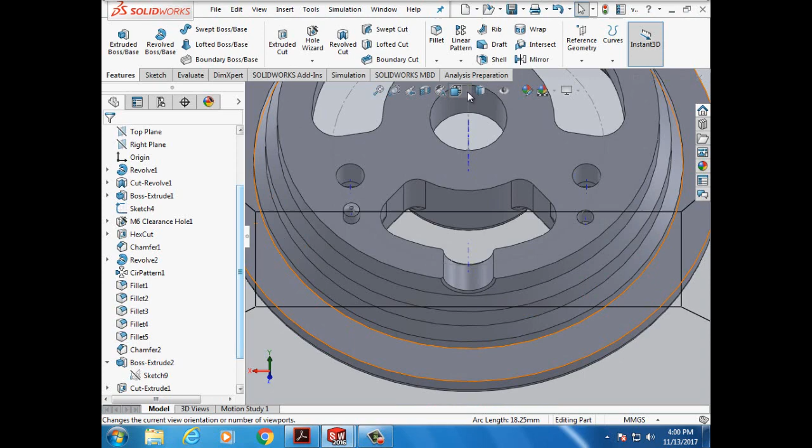Alright, so now we're going to add lettering, and then we'll have our hub done. Okay, so step number 1 is we go to the front view. Oops, there we go, click. So, view, zoom out, view, here we go. Oh my goodness. Front view, there we go. Create a sketch. We're going to do a center line across, and then we're going to create a centerpoint arc. So let's do this. So, whoops.

Alright, so we're going to click on the front face here, this circle. That's where we're going to do our writing. And we're going to go to sketch. We're going to hit sketch. Now you can see there's already a center line there. We can do another center line. Centerpoint arc. Start in the center. Bring it straight up. Alright, so we have that one going across. And then here is our center point arc. So we click on that. We click on the center. And then we click here and we bring it across like this.

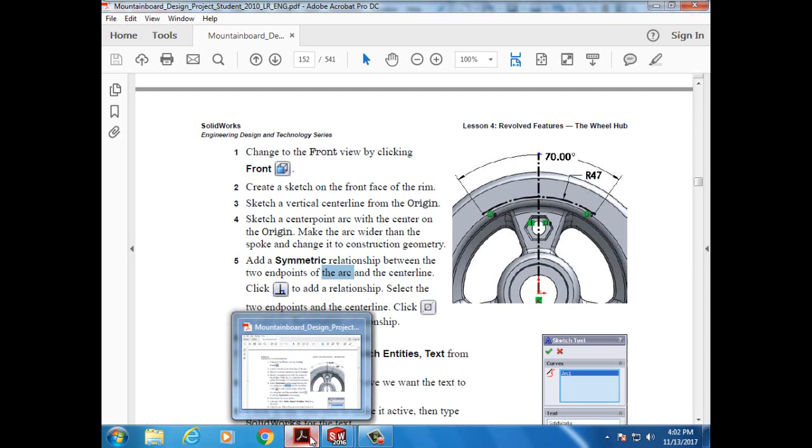And we want to change this for construction. And we want this to be 70 degrees at radius of 47. So we hit OK, that's great. Smart dimension. Alright, so we want this to be 47 millimeters. That shows it there. And we're going to want our center point, this one, to this one, to be 70 degrees. So it's 70. And notice how it isn't, it's off a little bit.

So, okay. So what we're going to do is we're going to add a relation. And we want this line, and I might have to zoom in a little bit. There it goes. And this arc. Let's get rid of that. Get rid of the arc. Delete. There's a center point for the arc. So I'm going to, there. This is the center point. No. Get rid of the arc. Delete. Zoom in a little bit more. This, now that's orange, this point. Okay, that's the point. I want that to be the midpoint, and now you can see that it's been centered. Alright, so that's all been smart dimensioned for us.

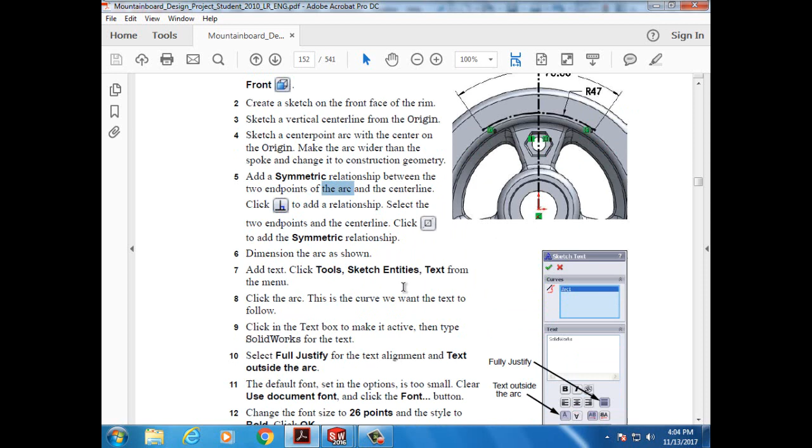So now we're going to go under our text, Sketch Entities, Text, and we're going to end up doing all this stuff. So let's look, right here is text, and you'll see we have... we want this to be on our arc. Get rid of the line 1. Oh my goodness. Let's click on this arc again. Okay, so we have the arc up here. You don't want the other one.

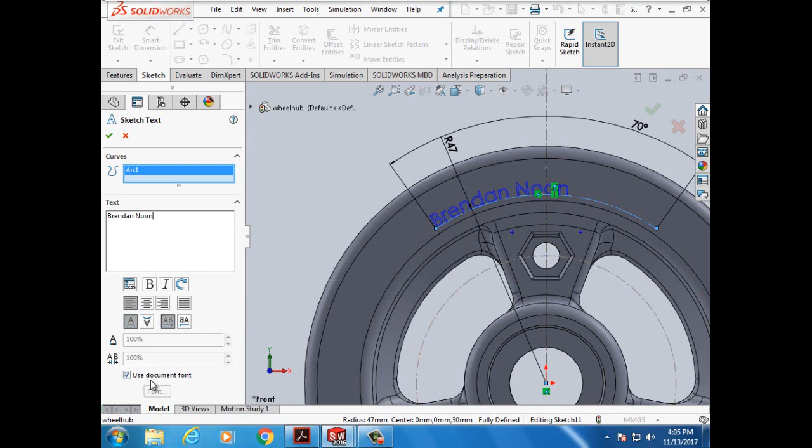The text says SolidWorks, but you're going to put your name. So I'm going to type here Brendan Noon. And you'll see how it just came across right there, Brendan Noon. All right, and you can kind of work with the fonts. I'll show you how to do what it says in the directions here.

It says make sure that you have it fully justified. You can put center on here. You have this text outside. And then we're going to change the font, and this is the font they tell us to choose. But if you want to use something that's more your style, then you can. It's not really too relevant which one you do.

All right, so we had full justify. So what that did was it makes it fill up the whole space. It pulls the letters out. This one we already selected. You could flip it over. It kind of looks like a mirror, like backwards, but we want this one. We want from our left to our right, not our right to our left.

There's other things you can do. You can just center it. So if you just want your letters not to be spread out, then you can just use the center one instead of the fully justify. But what we're going to do is when we fully justify this, we're gonna make the fonts bigger.

So we click off Use Document Font, and then we click on Font here, and it shows us what these different fonts look like. So you can pick different things for that. You can pick different font sizes, it's at 13 right now. Oh, points. Oops. Let's see. 28 might be too big. Was that 13? Let's go 22, and then I can hit OK.

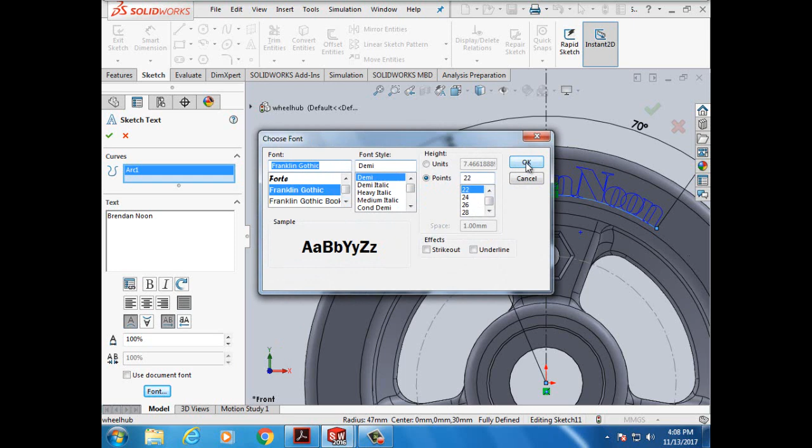So you can kind of work with these things. Let's see. That looks fine. All right, so that's good, just for these purposes. So we picked our font. Once again, it tells you use Century Gothic and bold and make it 26. But you can kind of test what things you wanted. And then you click OK. So let's go to OK.

And now it says we want to cut it, so we're going to hit Extrude Cut, and we're going to make it 1 millimeter deep. So Features, Extrude Cut, and it's at 5 millimeters. Let's do 1.5 millimeters deep. And then we hit OK, and what you see is it's cut the name into the wheel hub. It says to rename it text, but that's not really too relevant.

All right, so you can add color to the text. Select the text feature in the FeatureManager, Edit Appearance, and then we can pick a color. Oops. Waiting for this to zoom out. All right, so this is what it was. Edit feature.

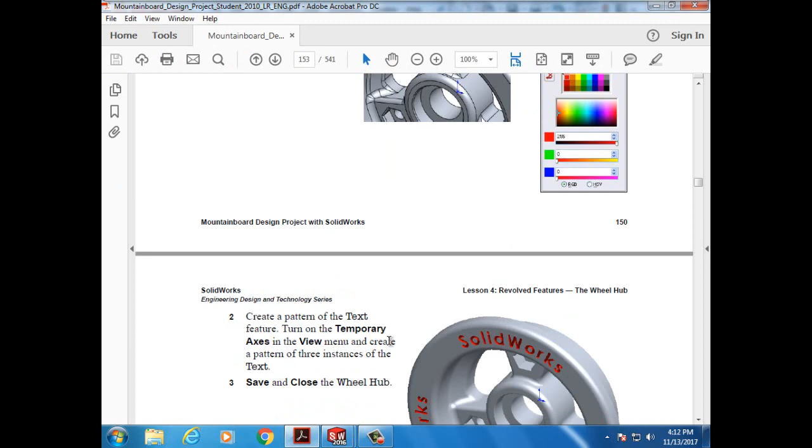All right. Create a pattern of the text. Turn on the temporary axes in the View menu. Create a pattern. Save and close. So we did this earlier. All right, so we already have it on our temporary axis. We want a circular pattern. Features, pattern.

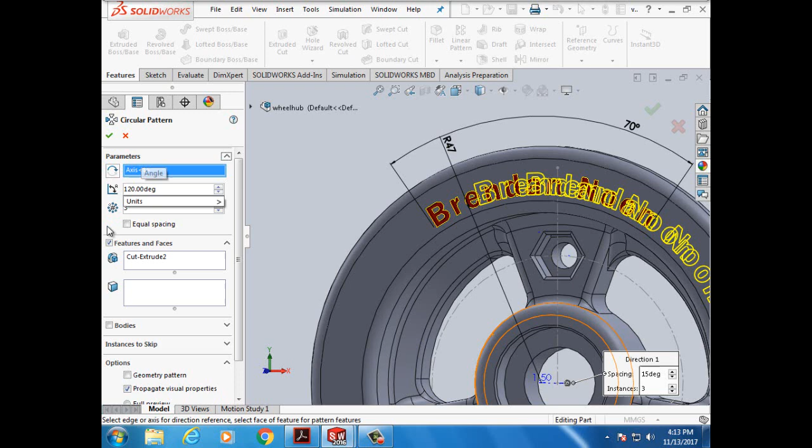We want it revolved around the center axis, and we want them to be 120 degrees apart. All right, let's see. And then we go OK, that looks like what we wanted. And there you go. So here's the name spread out, and save and close, and that's it. That's the wheel hub. File, Save, and the next part you'll just be putting together an assembly of all the items.